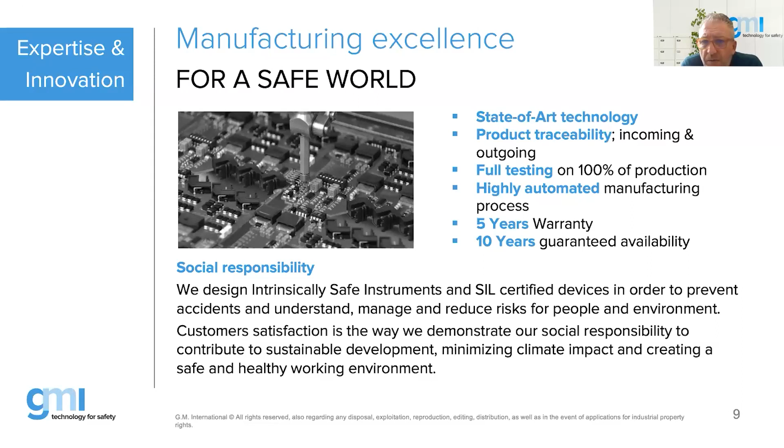So we do everything here in Italy, and before getting out, once it is produced, it is tested 100% before reaching our customers. So we have such confidence in the quality of our product that we provide a 5 year warranty upfront without requiring any extension. Let's go to the next few slides before entering into the topic.

Okay, this is shortly the portfolio of GMI. As mentioned, we cover the requirements of intrinsic safety or functional safety, or both of them.

So we have intrinsic safe barriers, safety relays. We have isolators, safety-related isolators, for example. We have power supply systems, a multiplexer system which can be installed up to zone 1 in hazardous locations. We have the customized termination board for easy connection to the main SIS or DCS system.

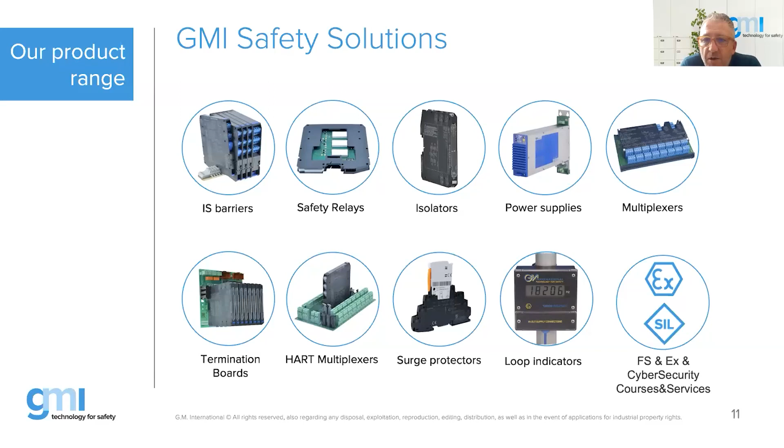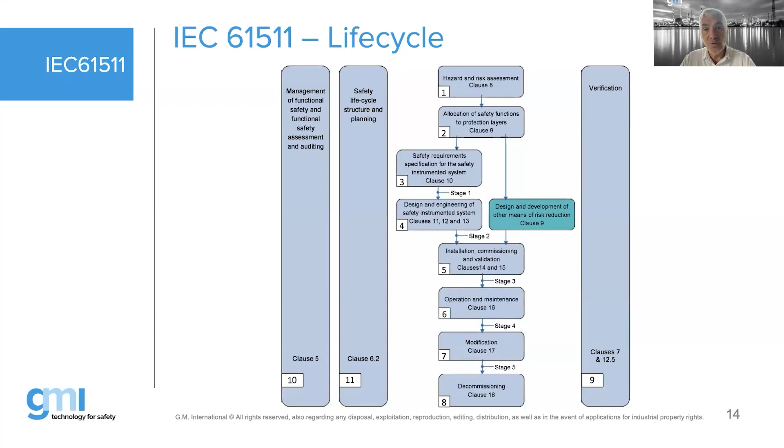It's like an overall topic, because we have already built a safety function. It is working in the field. And when do we find out it is no longer working correctly, or how long will it take us to repair it? That's the topic.

I take you back in time, back to before edition 1 was released of the other standard, called the IEC 61508. Let me just move a few windows, as I'm working on a smaller screen today and I'm a bit lost. Anyway, the safety function in the old days, before the IEC 61508 edition 1 in 1997 was released, was purely measured on a qualitative approach, which we used to call in English the requirement class, or the RC classes. But however, in the international world, many older safety engineers would refer to an AK class. And an AK class was an abbreviation for a German word called Anforderungsklasse, which means in English the requirement class.

We used to have 8 classes in that, and that came from the standard called DIN 19250. So when an engineer or a client wanted to have, let's say, a safety system—and I'm mainly focusing here on before 1997, on the safety PLCs—they were buying a qualitative safety system or safety PLC.

They were connecting instrumentation because at that time SIL, or safety integrity level, did not exist. All the client was worrying about was, can you provide a system with a safety availability of 99+%?

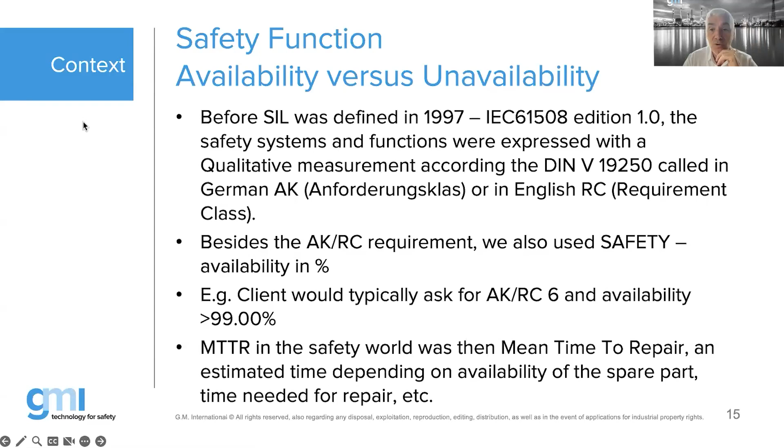In other words, they wanted the safety system working and available. Back then, MTTR stood for mean time to repair, a general concept most engineers used to estimate how long it would take to repair the system once the failure was revealed, either when testing it or when it revealed itself too late, meaning a demand came on the safety function and it wasn't working. From then onward we were counting MTTR, the mean time to repair.

Just trying to move forward. The old standard I referred to, called DIN V 19250, has been obsolete since 2004. However, you may have seen a similar picture like this, called the risk graph. There were 8 levels of Anforderungsklasse here: 1, 2, 3, 4, 5, 6, 7, and 8. 7 and 8 became, in 1997 with the introduction of IEC 61508...

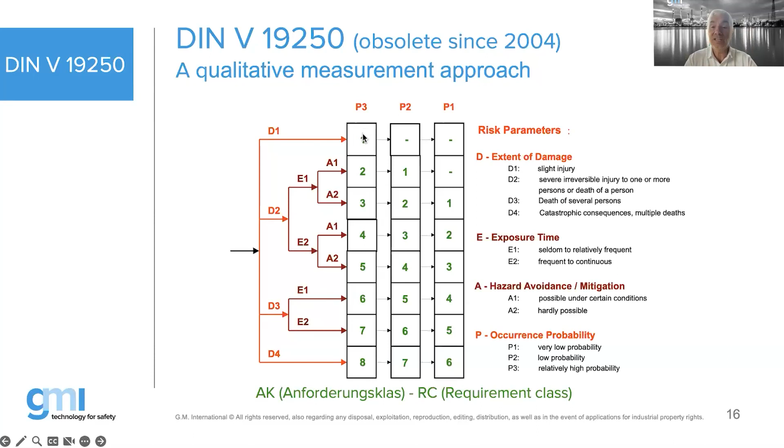...SIL 4. 5 and 6 became SIL 3. AK4 became SIL 2, and AK2 and 3 became SIL 1. For AK1, referred to here on top, there was no SIL integrity level foreseen.

I'm pretty sure that today, since we're already in 2023, we've long been talking about SIL integrity levels. The majority of engineers are actually talking about SIL levels, and they are referring also to what is the availability of that SIL level.

Simply speaking, for those who are new to this, I'll explain it this way. When you have a SIL2 integrity level safety loop, that SIL2 loop will be 10 times more available than your SIL1. In other words, the SIL2 will fail 10 times less than your SIL1, and the availability is expressed as the safety unavailability.

So we just do the opposite of what we used to do in the older days. We used to talk about the availability; now we are expressing it as the unavailability.

I'm pretty sure all your safety compliant subsystems, interfaces, or devices that you may buy, the manufacturer, like GMI, will give you a PFD number for that specific subsystem under specific conditions to be used, representing a certain number. On the right-hand column here, the easier way to explain it is your risk reduction factor.

For those familiar with the topic of risk reduction factor, what we're actually trying to do is reduce the likelihood or frequency of the hazard happening. In other words, when estimating how frequent the hazard will happen, we check with the end user on the tolerable frequency, what is tolerable, what is acceptable.

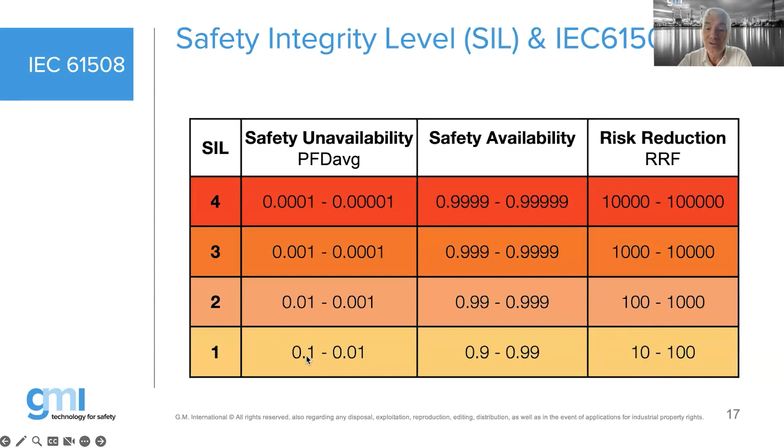If we have to reduce it, we typically reduce it in a band between 10 to 100, more than 10 up to a maximum of 100 would be a SIL1. So when you divide 1 by 10, that's again your unavailability here coming on the left.

Now, how did we estimate back in the days, using the MTTR? I'll give you the most common default numbers, which I still see today in 2023 in some SIL verification documents and reports that clients show us on projects. We used to have a default number between 8 hours, 24 hours, 72 hours, and 96 hours.

The 96 hours came from a very long weekend. This originated, in the old days, from a specific example used on an offshore platform, where they had to first find the person on duty to go visit the platform, find the spare parts, etc. So the whole theory behind 96 was purely based on a long weekend.

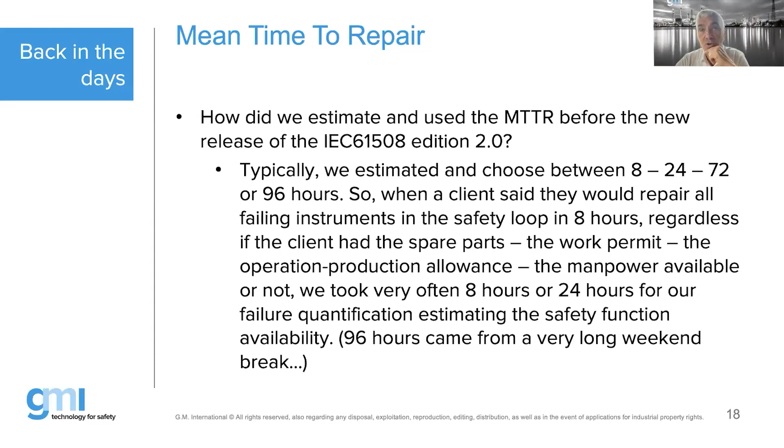24 hours is one shift change, 8 hours was within the same shift, and 72 was for a 3-day period, counted as the worst case before it would be repaired. Of course, no one was really wondering whether the spare parts were in stock or not; they were purely estimating based on the availability of the engineer to go repair it.

So after some research, and I'm referring here to a document from the ISA 84 committee, which is a safety division of the ISA...

The old MTTR only started from the moment that you knew the safety function was not working. The question is, when do we find this out? Do we find this out automatically? And that will be the topic for today, by kind of diagnostics built into your subsystem.

Or do you only find out when you're doing your proof test? When doing your proof test, the question is how long before you will do your test. The normal proof test intervals we hear in the market easily start from 1 year, which is 12 months, or 8,760 hours. So in the estimate of average unavailability, they take the maximum 1 year proof test interval divided by 2, purely estimating that at minimum half of your time your system is still working.

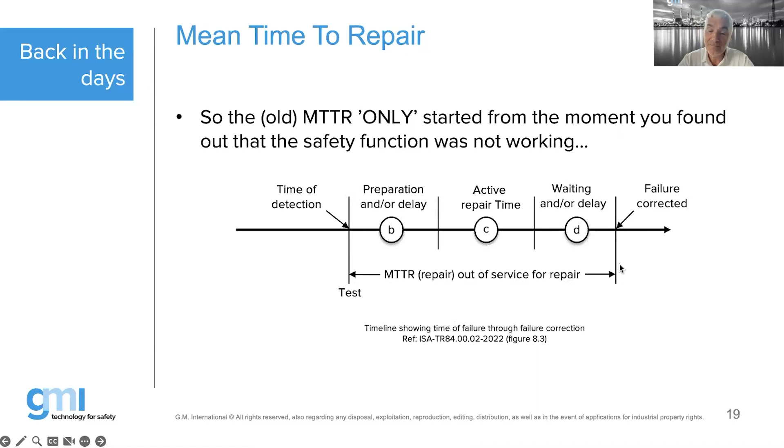What has changed? That's the topic for today. With the new edition 2 of the 61508, which came out in April 2010, the MTTR is no longer called the mean time to repair. It's now called the mean time to restoration. Some people may say it's only a new name or abbreviation in English. Unfortunately, it is not. Because the old MTTR, the one shown in the picture, is now called the MRT, and MRT stands for mean repair time.

So still the same theory: from the moment you know it doesn't work to the moment you actually repair it and it works again, we now call that the MRT, or the mean repair time. There should have been a closing bracket here, but as usual I quickly overlooked this and didn't see that. So there should also be a closing bracket here.

Diagnostics, providing the diagnostic coverage, can detect the failure—there's also something called undetected, but this is about the detectable failures with your built-in diagnostics. From then onwards, you will know it doesn't work anymore. That means that is where the MRT will start.

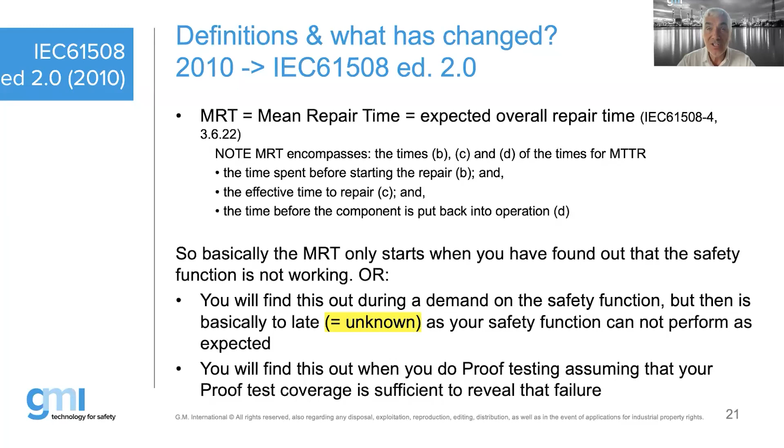So that is our unknown factor, as your safety function cannot perform as expected or as per design. Or you will find this out when you do proof testing, assuming that your proof test coverage is sufficient, because there's also something called proof test coverage. Basically, it doesn't matter how frequently you test. It also matters how good you can test, how many failures you can reveal which are not detectable.

I have a small correction to make, and it's also great that some other experts or trainers in our domain of functional safety are watching the webinars from GMI, which gives me the pleasure that it is worth that people are trying to see what we are saying. In contrast to the previous webinar given in November 2022 about the same topic, where we linked the MTTR also to the proof test, this was not correct, because the MTTR is only linked to the automated diagnostics.

And I refer here to the reference of Harvey Dearden, with the website link, you can check this out, because Harvey also has a tool called the SIS Suite, which is one of the SIL verification tools. It came from Harvey with a personal message to me saying, Tino, I think the MTTR that you mentioned is not correct because it is not linked to proof test, only to diagnostics. Therefore, here, this correction. Again, thank you to Harvey for that.

So the new MTTR, which we just have seen, comes from report number 2 from the ISA 84 committee. If you read that document, they also explain why the new standard edition of 2010 has corrected the MTTR from the old days to the new one today. And the new one today has been adopted by the IEC 61511. That is why we have this webinar. That means we have the same concept of MTTR today in the process industry as also the 61508 edition 2010 has released.

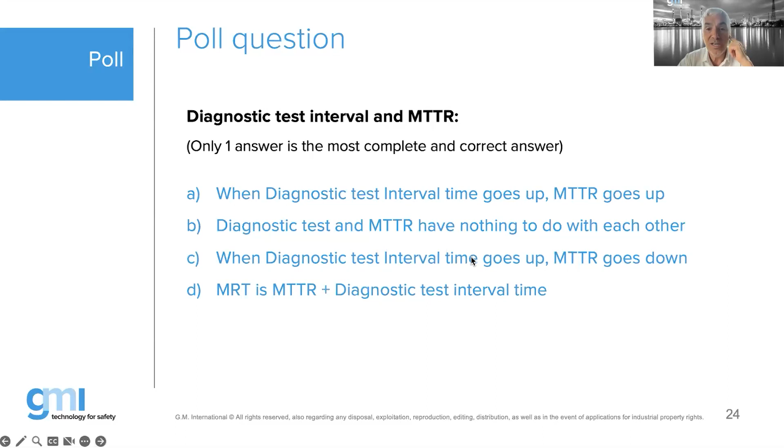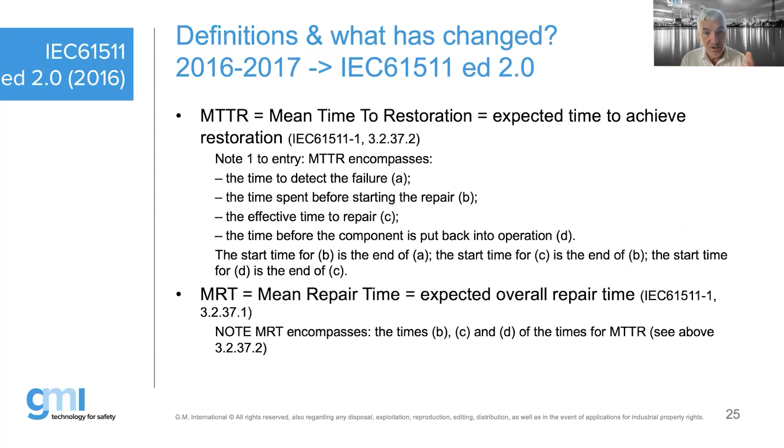All right, Mauro, let's continue. So the topic for today is related to the 61511. The introduction has been given based on the old edition, the old MTTR definition before the IEC 61508 edition 1 was released in 1997, which was reviewed in April 2010. That means our latest edition today for the process industry, 61511, has also adopted the same concept. The text is all the same — MTTR, MRT is identical to, or the same as, in the 61508.

What we also have in the 61511 edition 2 today is the maximum permitted repair time — that is the maximum duration allowed to repair the fault after it has been detected. For instance, we have the theoretical concept of how long it will take us to repair it. On top of that, we can also say, yes, we estimate it will take us 8 hours, but what if the subsystem is not available? What if we don't have it in spare? What if we have to order it and there is a big delay in delivery time?

Well, that needs to be estimated if possible, saying what is the maximum permitted repair time, because it cannot be correct when you have a SIL X qualified safety loop and you say, well, the subsystem has failed, however we have to order it and we have a 3 months waiting time. The question is, how will you compensate for the subsystem which is no longer available, to reach or achieve your safe state on your safety loop?

Proof test, which we already mentioned — proof test means that for all those failures that cannot be detected with built-in diagnostics, for all the other subsystem failures, the engineer will have to reveal the failure. So we don't call it detecting the failures, but revealing the failures, for those that are potentially dangerous and those that are also potentially safe failures.

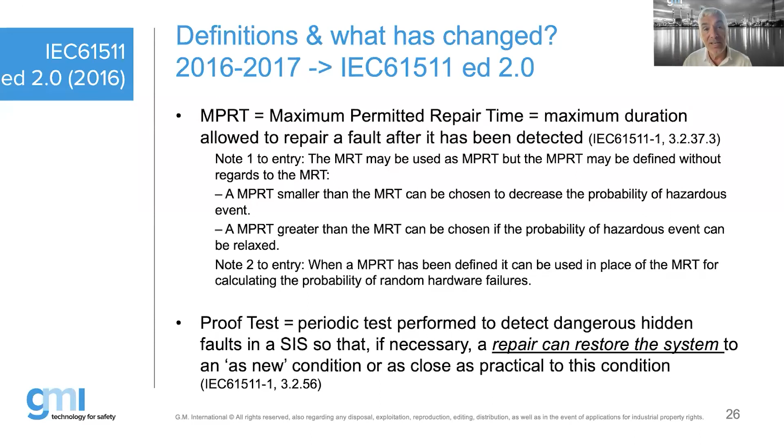Enable for us then to estimate and to say how available is my safety loop. We are required to document the failure behavior of our safety loops based on the 61511 requirement. And for that, of course, we need all kinds of information. And I yellowed here a few ones.

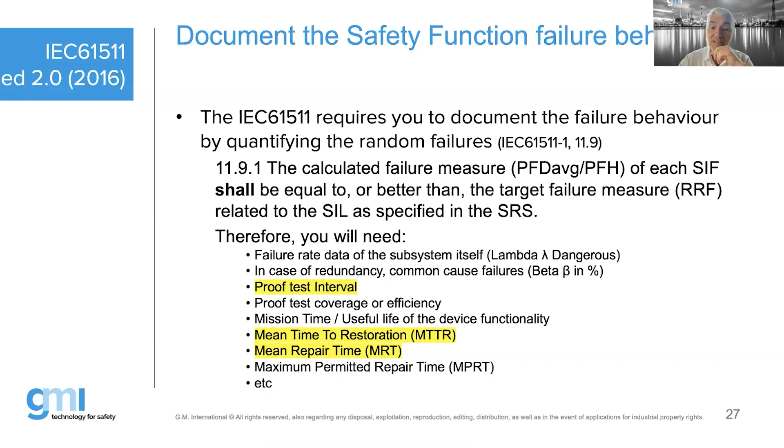Of course, we need the proof test interval. We also need the proof test coverage. And we also need the MTTR and the MRT. So those are all times that we will need to fill in our most likely commercial SIL calculation tool. And based on all this data we enter, the result will tell us how unavailable, predictively, that safety loop will be. In other words, what is the PFD?

The problem that we have since 1997 until today, in all these years of wisdom and industry experience, there is no, and I repeat, there is no normative formula in the standard that everyone around the world will use with the same method to predict the unavailability of their loops. That is good news, that is bad news.

The good news is no one can prove you are wrong, because simply there is no reference, hard cast on paper, there is no normative section in the standard to tell you how you should or shall calculate. They only give examples, and the examples are simplified, let's say, formulas in the informative section. And the word informative is here the bottleneck, because it is informative, it is not normative.

That means the bad news for us all is that everyone is trying to estimate, everyone is trying to calculate, and everyone has his own idea on how to do it, or is based on a commercial package. But there's no one that can prove you are correct. There's also no one that can prove you are wrong. Beware that the IEC and even the ISA both have a different vision on the simplified formulas that you may use.

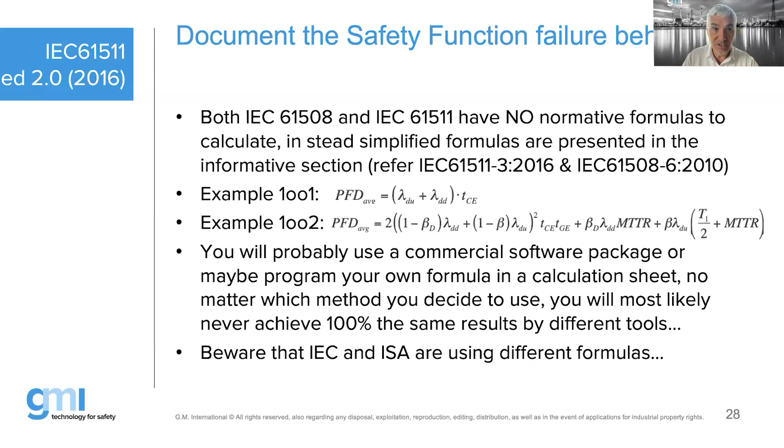What will be now the challenge for you and for all of us? Well, when GMI is selling these interfaces, which are SIL compliant subsystems, GMI, of course, also has a liability towards the functionality. GMI also has a prediction of how long it will work before the system potentially will have a failure.

That is the famous bathtub curve, which I will not go into depth now. But before the wear out would kick in into any subsystem functionality, there will be a predictive, let's say, time that it will work. So shorter than the time that they will know that it will work.

Let me give you an example. Assume that one of the modules of GMI may have a lifetime of about 20 to 25 years. GMI may want to take some liability margin and will say, well, we recommend you, Mr. End user, or the person who will use that, let's say, subsystem, we recommend you that after 20 years to

prove that the system is still working. Therefore, if you go into the GMI safety manuals, the safety manual is a normative requirement from the IEC 61508. In that manual it will be clearly explained how and how frequently you have to test. In other words, the proof test coverage will be explained along with the proof test interval.

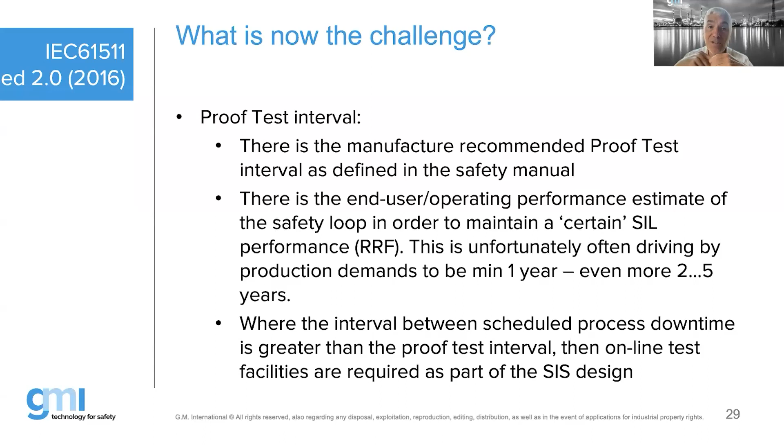This is not the proof test interval that maybe your SIL calculation tool may estimate, because that may be more frequent, because there you will look at the mission time of your safety loop, and based on the mission time of the safety loop, you may have a specific, let's say, proof test interval that is potentially shorter.

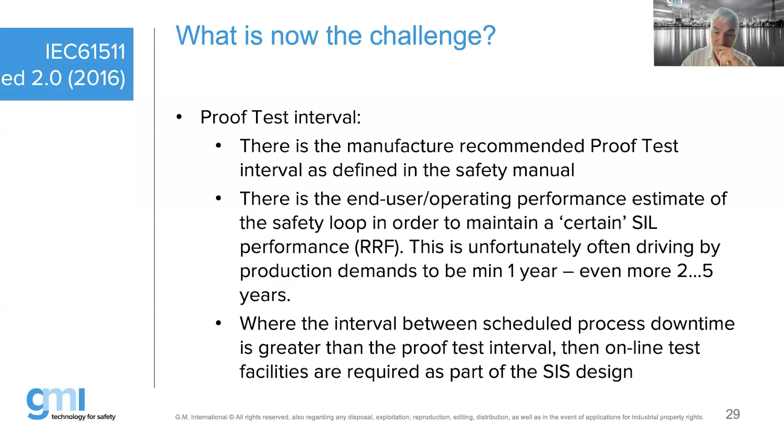Continuing, the IEC 61511 report number 4 is another point of confusion regarding maintenance, relating to facilities desiring a long test interval. In other words, when you have, for instance, a facility where the production management, production engineers or operators are telling the safety engineer, you are not allowed to close the valve in the next 5 years.

Why not? Because we are not allowed to stop the production. If for that reason, for instance, the proof test interval, which was required on paper, is every 3 years, but production is saying, no, we cannot do it before 5 years, well, then we do have a problem.

So the standard is now saying SIS devices which are not able or not allowed to be proof tested at a design frequency due to production availability requirements are not fit for purpose and need to have a redesign, which is a very strong statement to help the safety engineer in a discussion with the production responsible people, to say, listen, it's not down to the production requirements how long this system needs to work.

If the proof test interval is shorter than your requirement that you want to use it, something is not correct.

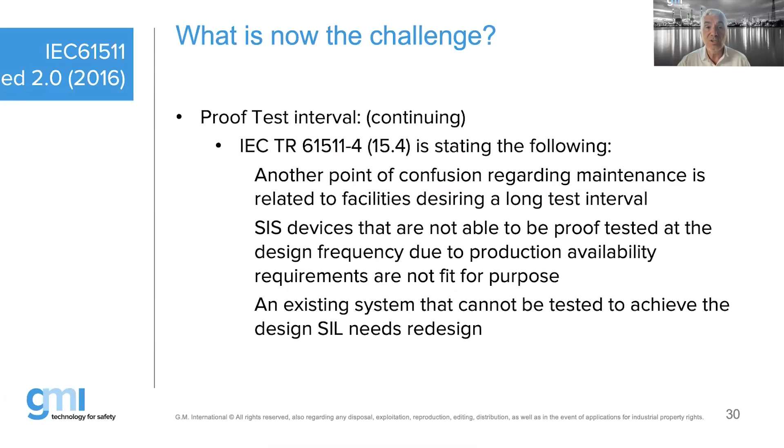Right Maro, we have a last poll question for today, or maybe second last. Which one of the following statements is correct from an end user operating company point of interest? Launch it, you should read it. Yes, we see it now. So from an end user, operating point of view, which of the following statements is the most complete and the most correct?

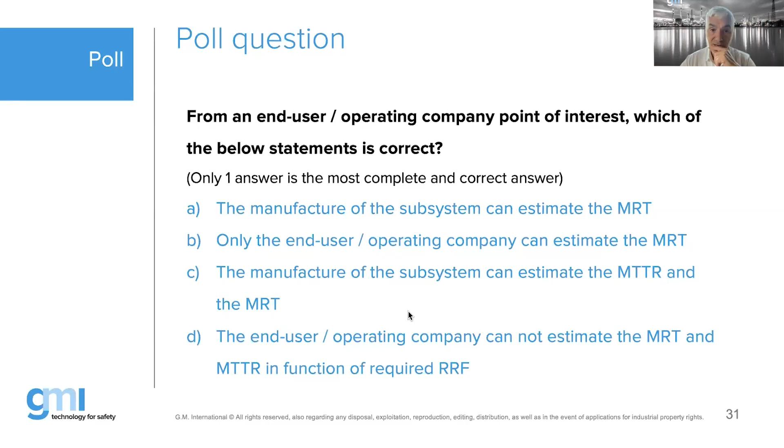So the last topic, the end user operating company cannot estimate the MRT and the MTTR in function of the required RRF. It's partially not correct. That is why the MRT, yes, the MTTR, it all depends again. Do we talk about the MTTR in general? Do we talk about the real MTTR, which is based on diagnostic coverage or test interval? Or do we talk about the MTTR, which I already explained, on the unknown factor, which may be your proof test interval? Right, Mara, I will stop sharing that.

We will finalize with a summary.

With the summary now, all this theory, all these definitions of timing, the MTTR today, in the new edition of the standard, both 61508 and 61511, is related to from the moment we detected that the failure was in the system. That means we detected it with a diagnostic coverage. It's not correct when there is no diagnostic coverage there, because then the unknown factor comes into play.

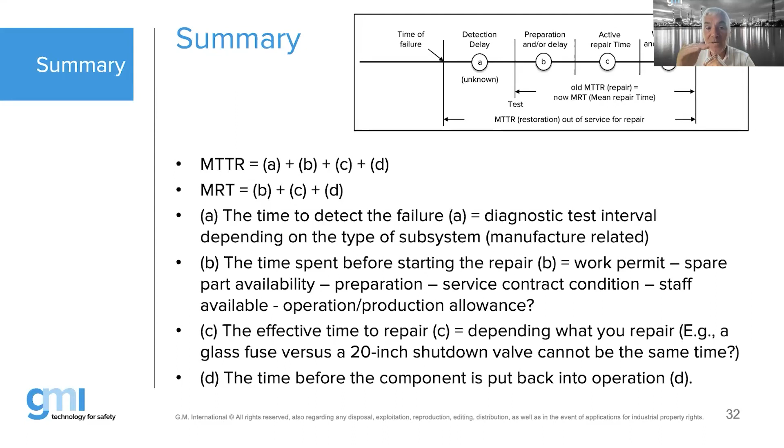I simply explained here the times A, B, C, and D, which I will not repeat since we have done this before. But I have one last slide which may be of interest for you.

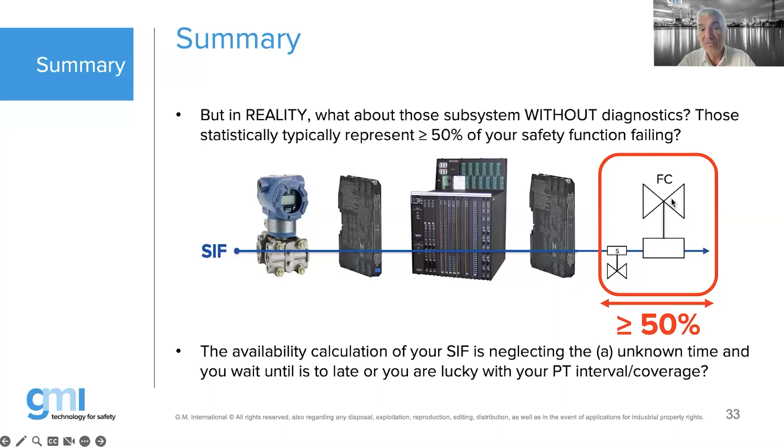So in reality, the question will be, from all the pictures of all the symbols of all the subsystems in the safety loop, those who have no diagnostic coverage are typically the final elements, from the solenoid starting to the final element itself, meaning your shutdown valve. Statistically, from the industry, the failures representative of a safety loop not working, 50% is always coming from the final element sections, and in those we have no diagnostic coverage.

Whereas the other 50%, from the sensor all the way to removing the power with the safety interposing relay, that represents about the other 50% of the failures. That is typically based on diagnostic coverage, most of them, and typically based on internal redundancy, hardware fault tolerance, etc.

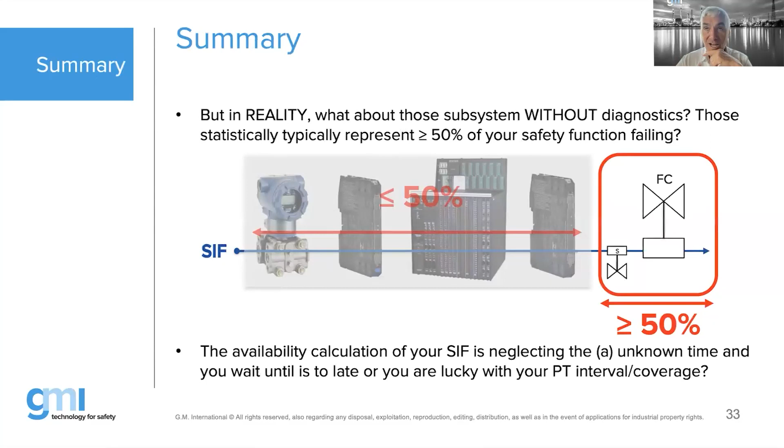For those where we do know the failure, where we are alerted that they are not working and that we can degrade into redundancy, that is where the MTTR comes into the picture. For the last one, where we have no idea until it is too late, that means until we are testing it and then find out that it is not working.

So it's not too late yet in the sense that you didn't need it yet, but you will find out when you are testing. When it is really too late is when the safety function is trying to close that valve and finds out the valve is stuck open. That is where we have a problem.

Now, I know there is some theory also by some vendors and some calculation tools to take credit for a partial stroke on a valve. Classically, the partial stroke test on a valve is only there to try to reduce the full stroke interval. That means we put in a partial stroke on a valve to reveal partially some of the potential failures, in the hope that by revealing some of the partial failures, we will estimate that at least those are still working.

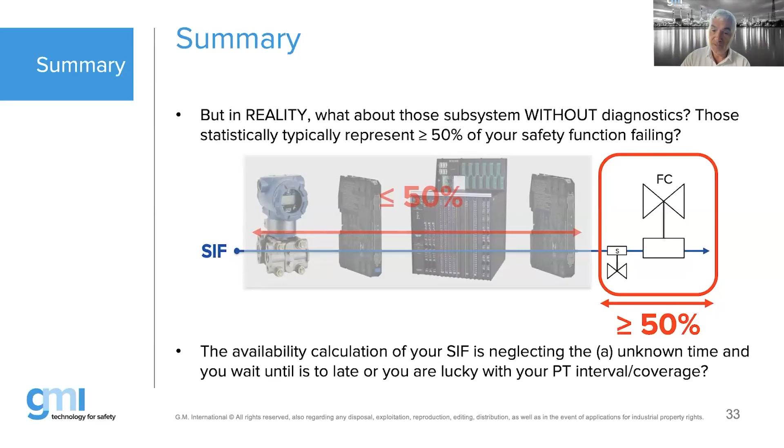The other ones hopefully will not stop us from achieving the full stroke, or let's say the safety position. But that is purely theory which doesn't make the valve safer. It is purely taking away some of the potential dangerous failures on that valve by proving them in a partial stroke.

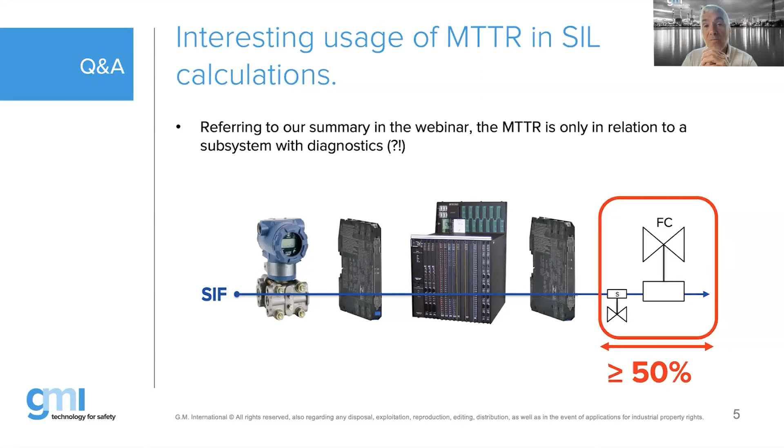Interesting uses of MTTR in SIL calculation - this is a very relevant question, and I'm repeating this because I thought it was important. Referring to our summary in the webinar, the MTTR is only in relation to a subsystem with diagnostics. The ones that are not circled red are most likely covered with MTTR and have built-in diagnostic interval/coverage. Where we typically struggle are the final elements, which also represent, for a specific reason, more than 50% of failures in the industry in your safety loops.

What are the reasons that pushed the change of the acronym MTTR from mean time to repair to mean time to restoration? That was also already answered, but I'm repeating it here. The second edition did this, following really the footsteps from edition 2 of the 61508 from 2010.

And the real reason was that they added that detection delay, and that is also most likely why the MTTR is only in relation to diagnostic coverage interval, not in relation to your proof test interval. So the proof test interval could potentially be the unknown, and you have a demand on the safety loop and then you find out that it's not working. But if you have tested before, hopefully you will find out before it is too late. That is where they have neglected the MTTR in that PFD calculation.

We have one more question by memory: how does the MTTR value impact the selection of a SIL certified product? I found this an odd question, and I thought, well, I'm not going to answer that because it's really odd. But then I thought, maybe it's not so odd, because we are maybe too stuck in our own functional safety world. Think about someone who has to make a selection, who has to buy a specific product.

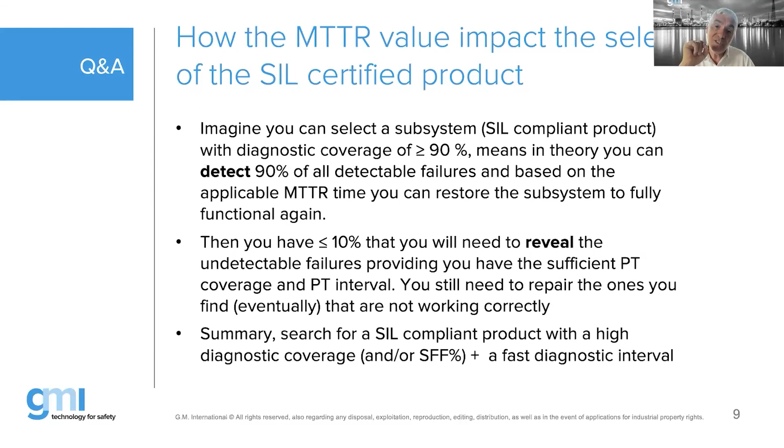That means there is a rest failure of, in theory, less than or equal to 10% of dangerous failures that you will have to reveal. We're not talking about detected failures here - you need to reveal those failures because diagnostic detection could not detect them for you. For that remaining roughly 10% of failures in the subsystem, you will need sufficient proof test coverage and proof test interval to reveal that failure. And from the moment you reveal it, you will need the right procedures, availability, and allowance to go and repair it.

In summary, I would search for the SIL compliant product with the highest diagnostic coverage available on the market. That's also why, in reality, in the market, there are not many safety compliant subsystems available with a safe failure fraction and or diagnostic coverage lower than 60%. Because lower than 60%, they would struggle even to reach a SIL 1, depending if it is a type A or type B based on IEC 61508.